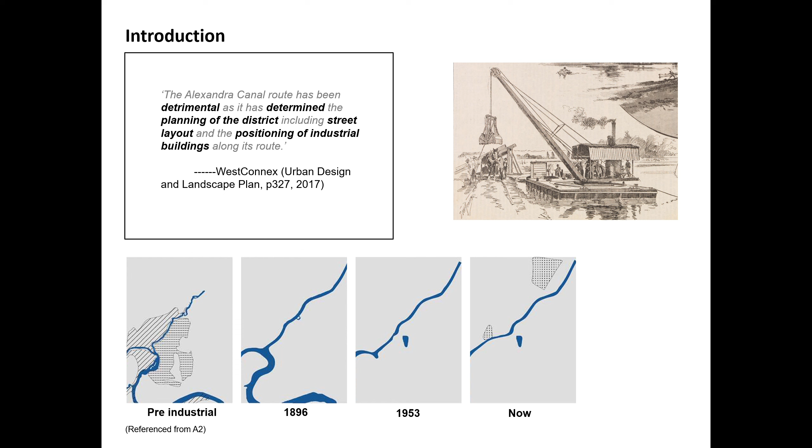Here's a table of contents, so let's start from the introduction. The Alexandra Canal is a heritage site in New South Wales that needs to be protected, but its evaluation is not entirely positive. A planning document criticizes that its existence determines the planning of the area, including street layout and the positioning of surrounding industrial buildings. This report aims to deduce the urban and transportation development history of a part of the Alexandra Canal based on historical maps and understand the reasons for the formation of urban forms in the region.

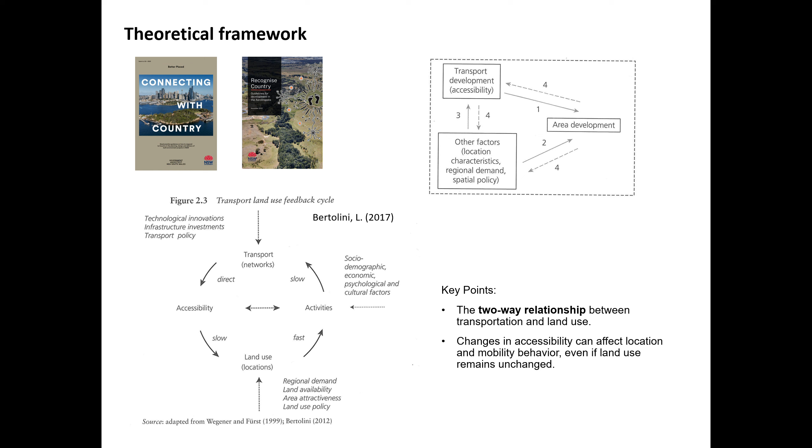The theoretical framework of this article is based on the relationship framework between transportation and urban form. The research has found that these two things determine each other. Even if the land use pattern remains unchanged, changes in accessibility can still lead to changes in local mobility behavior.

Firstly, here's a historical review. At the first stage, the establishment of the canal is to achieve efficient and low-cost waterway transportation. Therefore, the accessibility of factories on the riverbank is the highest. The canal has shaped the industrial zone and the first layer of road network along the river.

Then the canal is silted up and can no longer be used for water transport, combined with the transformation of surrounding farmland into residential areas for development. The accessibility of industrial areas continues to decrease.

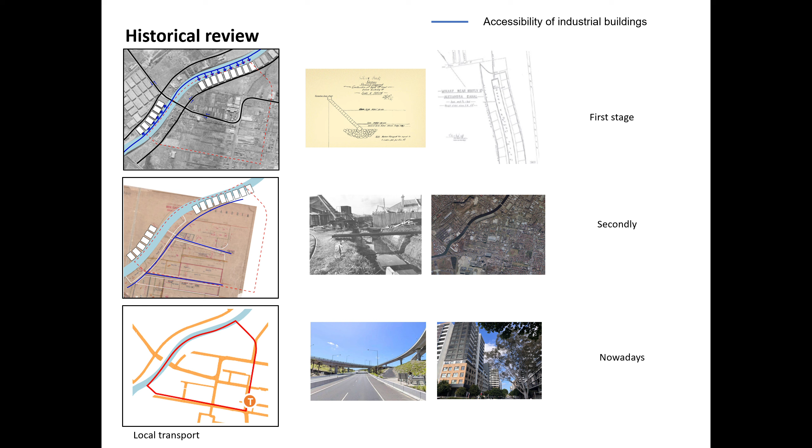Finally, the city continues to develop, and more connections are needed on both sides of the canal. So the selection of the site is located within Mascot, which includes the early factory forms built along the canal, the second-level factories established during the midterm industrial development, and the newly built apartment and residential buildings in the area that have developed to this day.

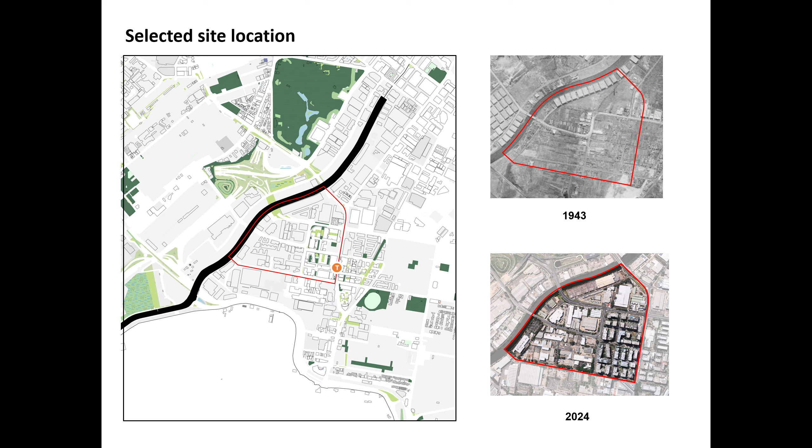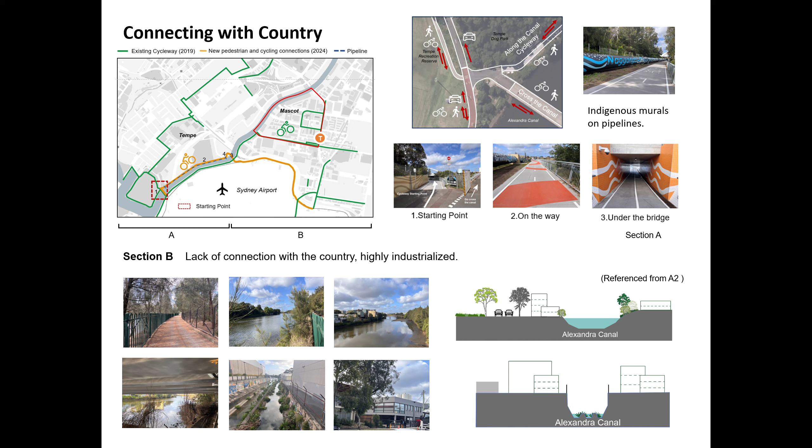In the previous assignments, through on-site investigation, we walked through a carefully designed cycling corridor along the canal in Section A and felt a strong sense of place. Then, in Section B of the canal, it may have been difficult to reach along the canal due to the density of industrial facilities. Now, let's analyze the building form of the selected area.

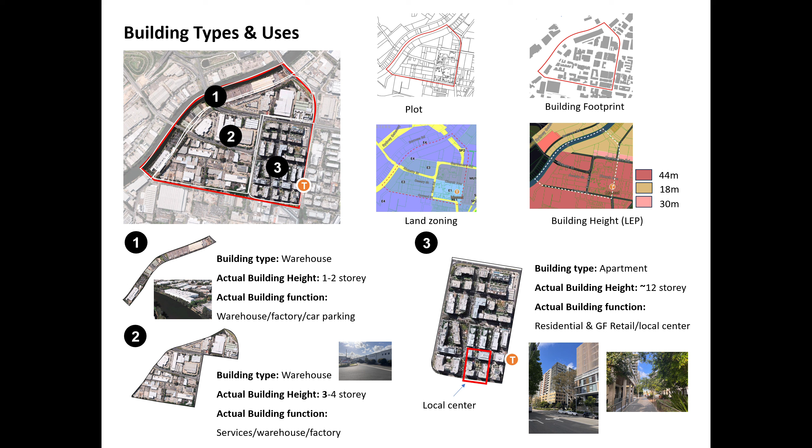The building form and function here are closely related to the distance from the canal. As the distance from the canal increases, the length of the blocks becomes shorter and more refined. The building form is more suitable for living.

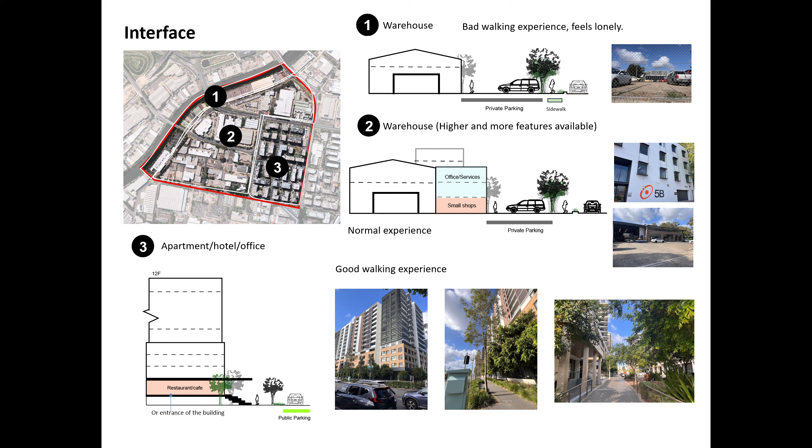These are some section views of building interfaces, which show that as the distance from the canal increases, the space at the junction gradually decreases. The design of neighborhood and buildings tends to be more compact.

It is noteworthy that the popular open spaces in the selected area are also located far from the canal, around the apartment buildings. There are only a small portion of unpopular open spaces in the area near the canal. So I believe that it was the canal, as an earlier mode of transportation, that determined the form and building functions of the neighborhood along its banks.

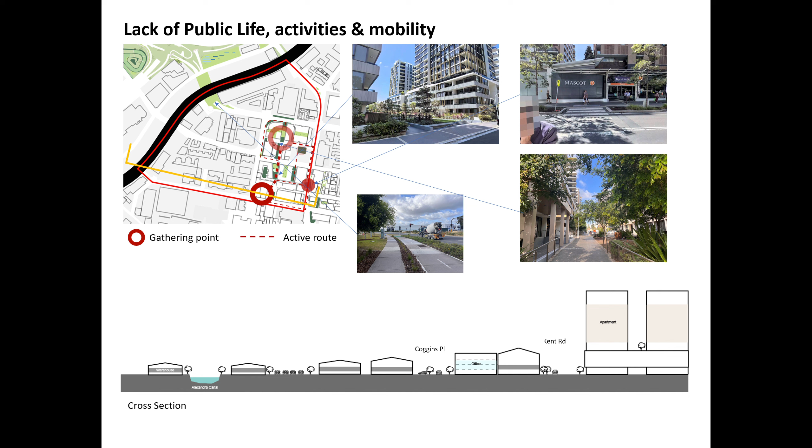With subsequent development, the accessibility of industrial areas along the canal gradually declined, resulting in changes in crowd activity and mobility. Walking at the end of the canal, the sound of factories around me seemed to remind me that this place once provided a large number of job opportunities and produced a large amount of materials for the urban construction of Sydney. But when I looked down at the canal surface and the dirty and messy canal shallows, I saw the enormous pressure that industrial production had brought to the ecological environment.

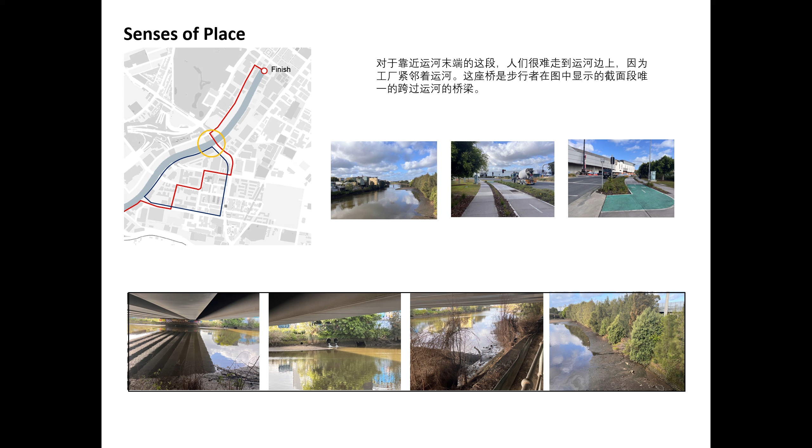This is a problem that humanity must always face. Looking back at some recent planning background, it can be seen that the government is making an effort to improve the current situation of Alexandra Canal.

Early planning was dedicated to protecting the canal. With the development of cities, industrial areas along the canal may have to be demolished and rebuilt. As new highways and bridges cross the canal, accessibility here will undergo significant changes. Therefore, perhaps in the future, the neighborhood where these factories are located will be replaced by highly compact urban buildings.